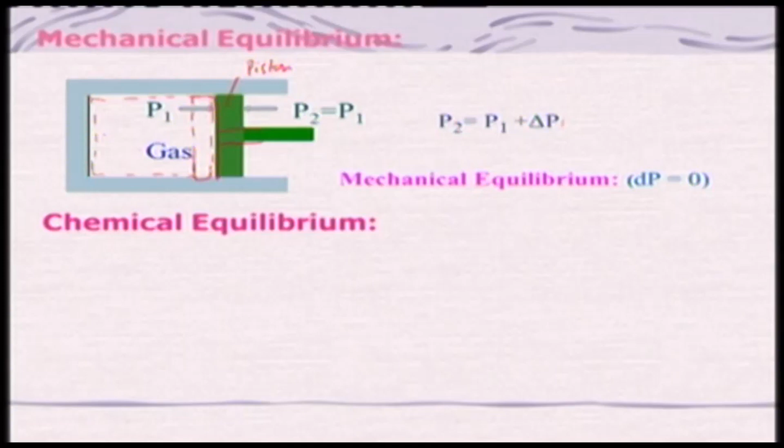So, let us take a similar example to what we had taken earlier. These are two chambers. The first chamber contains oxygen at 300 Kelvin and 0.1 megapascals, and it is separated from another chamber which contains nitrogen gas at 0.1 megapascal and 300 Kelvin, and there is a partition here.

And what will we do? We will remove this partition, and then what will happen? Oxygen will be trying to move in this direction, and nitrogen will be moving in the opposite direction, because the concentration of nitrogen is 0 here and here it is very high. So it will be moving towards that. After a certain time, what will happen to the concentration of oxygen and nitrogen? It will be uniform across the whole system.

If I say this is my system, across everywhere it will be uniform, provided you have given enough time for the diffusion to take place. And as a result, the change in concentration will be 0 in the system, concentration is uniform. So then we say the system has attained chemical equilibrium.

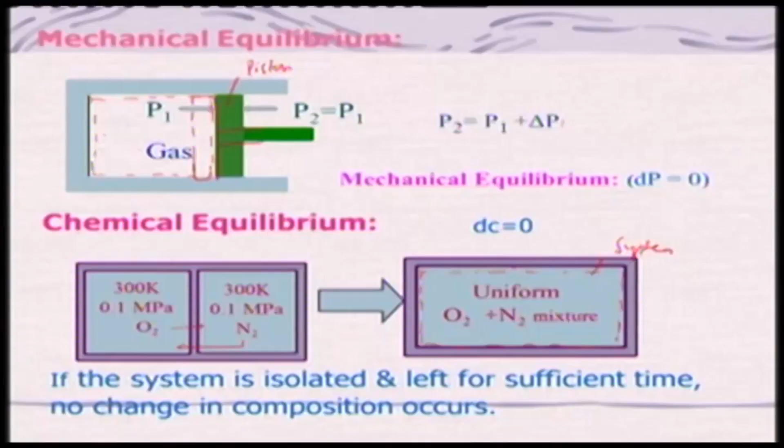This is a simple example I have taken, but let us consider another example where 2 moles of hydrogen are mixed with 1 mole of oxygen. What will happen? It will be mixed properly. Let us say all diffusion has taken place, and if it attains a high temperature, then what will happen? It will go to 2 moles of water, right.

And at the same time, the water can be converted into oxygen and hydrogen as well; both will be taking place simultaneously. That means hydrogen is reacting with oxygen to form water, and water can also be dissociated into hydrogen and oxygen, provided it is at a higher temperature, otherwise no.

So now we can say there will be a forward reaction rate and a backward reaction rate, because a chemical reaction is occurring, and there will be formation of new bonds and also breaking of bonds. All these things are going on, and the system attains equilibrium only when the forward rate of reaction is equal to the backward rate of reaction; then the system attains a chemical equilibrium.

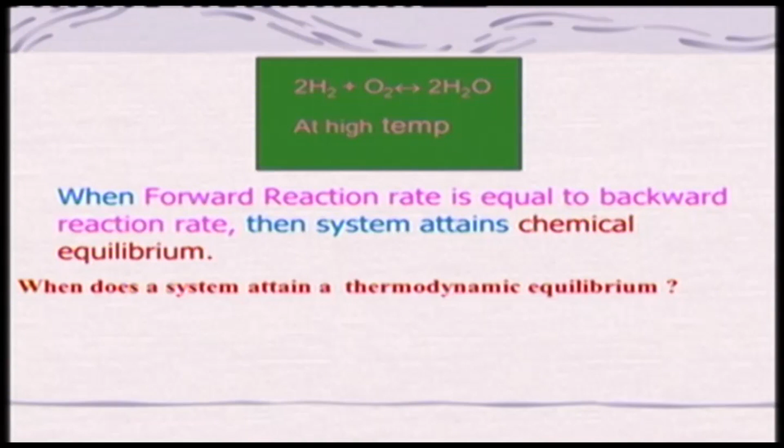So, to summarize, a thermodynamic equilibrium can only take place if all these 4 equilibria, that is thermal equilibrium, mechanical equilibrium, chemical equilibrium and phase equilibrium, are being satisfied. In other words, a system can attain equilibrium thermodynamically if all these 4 equilibria can be attained by it.

If you look at thermal equilibrium, it is basically equality of temperature, and mechanical equilibrium is equality of pressure in the system. The chemical equilibrium is basically equality of concentration, right, and phase equilibrium is the equality of mass across the phase boundary. That means, whether solid to liquid or liquid to solid, the mass will be remaining the same. So, therefore, it will be the phase equilibrium.

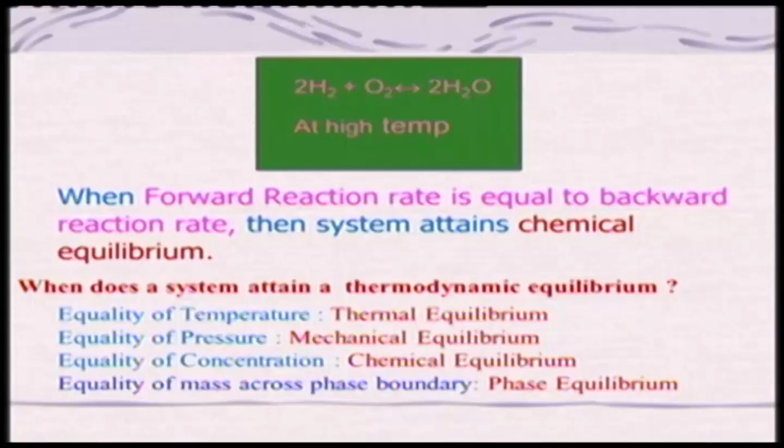Now, we will look at how stable the equilibrium is, right. That means this equilibrium state is there, but it may be stable, it can be unstable, or it can be neutrally stable, it can be metastable. So, stability is a very important part. Equilibrium states can be divided into 4 categories: stable equilibrium, neutral equilibrium, unstable equilibrium and metastable equilibrium, right.

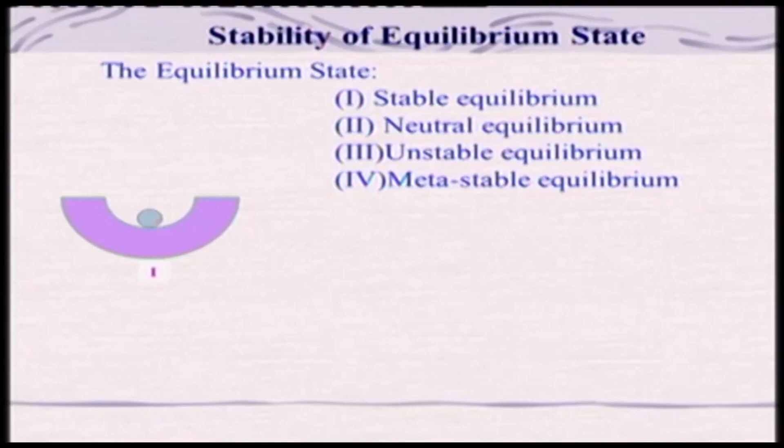So, let us take a very simple example which most of you might be aware of. Let us say there is a ball here in a curved surface, and due to something it moves to, let us say, this place. What will happen? Due to some force it has gone to this place. When the force is released, what will happen? The ball will be returning back to this position and it will stay.

Similarly, if there is a change in the position of the ball in the other direction, right, then again the ball will come back and stay in the minimum energy state, right. Under this condition we say that it has reached a stable equilibrium, because if there is a change of the position of the ball, it can return back to the undisturbed position, right.

It does happen in our life, am I right? Suppose somebody scolds you, your mind will be agitated, am I right? Yes or no? Somebody can praise you, you will be elated, and then after that you will come to your normal position, right. That is nothing but your stable equilibrium. Either you are happy or you are unhappy, your mind will be agitated; you are not in the normal, stable position. So, that is the natural thing we experience.

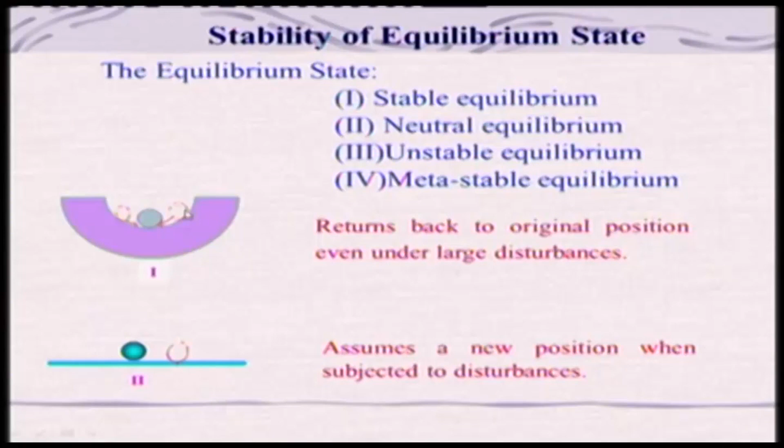And we also experience similar kinds of things in our life. For example, you were very happy with your family when you were doing your work with your family. Now, you have come over here, you are now in a stable position in this institute at this moment, right. Maybe after finishing your course, you will go and do a job or some other thing, and again you will get a stable neutral position, right, yes or no. So, this is a neutral position. But if you come back to the stable position, we call it stable when, even with large disturbances, it returns, right.

So, let us look at another case where the ball is on this kind of surface, like a mountain or hill. You might have seen sometimes, when you watched a mountain, a very big stone lying on the top, and you might be thinking why it is not falling down, and if it will fall down what will happen, particularly when you go to the Himalayan region, you may find similar things.

I had a similar experience. I was thinking, if it will fall what will happen. So, if there is a little bit of disturbance here, what will happen? The ball will roll down and it will not come back to its original position. So, it never returns back to its original position once it is disturbed, right.

So, that happens also with our day to day lifestyle now, we are becoming irritated for smaller things, right. And this is a position which should be avoided.

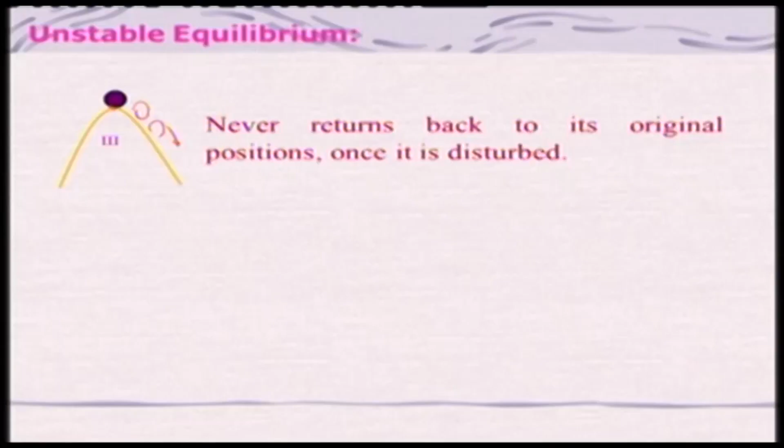So, let us look at another case, if the ball is in this position, and there is a little bit of change here. Let us say if the ball is here, then it can return back to the original position, but if the position is changed to here, what will happen? It may be a little bit stable, but if we go over here, it is going down, it is becoming similar to the unstable equilibrium kind of thing.

That means, if there is a small change, it can manage, it can come back to its original position. But if it is subjected to a large change, then it cannot really return back to its original position; that is known as metastable positions.

If you look at phase change, a lot of metastable positions do take place; when we discuss phase change, we will know you can have subcooled liquid even at a little higher pressure. And there is also iron, like in cementite, in a metastable state that can remain for years together. And if you look at your glass, glass also is metastable; if there is a little jerk, it can break, not like toughened glass.

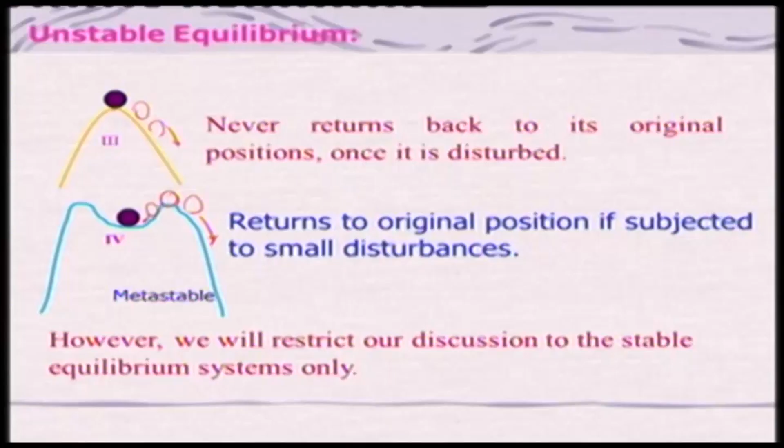However, we will restrict our discussion to stable equilibrium systems only, and maybe I will discuss a little bit about metastable equilibrium when we discuss phase change processes. So, now let us look at process and cycles in thermodynamic systems, because the thermodynamic systems are in the state of equilibrium, right.

And if you look at the process, it basically takes place whenever a system is interacting with its surrounding. It will go from one thermodynamic equilibrium state to another thermodynamic equilibrium state. That change in the equilibrium position, from one position to another, is known as a process.

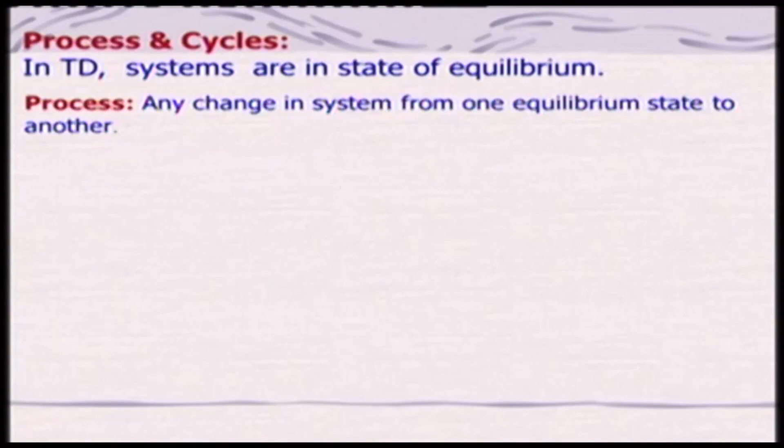So, let us consider our piston and cylinder, which contains some gas, and this we call the system boundary. If there is a small change in pressure, what will happen? The system will move and attain an equilibrium position. The piston will move in this way, and it will attain an equilibrium position.

For example, let us say that you are at state 1 at this point. And suppose, as I told, there is a small tiny pressure change and it is moving; then it will come to position A. And if you go on changing this pressure by a small amount, the gas molecules nearby will try to resist this motion, and as a result the pressure will be increasing at this point, because it is being compressed, right.

And you will attain another state B, and you go on attaining these various states as you change this pressure on the other side of the piston. So, the point will be moving like that, and you attain a state 2. If I join each position of the system as it goes, we call it a path, or a process path.

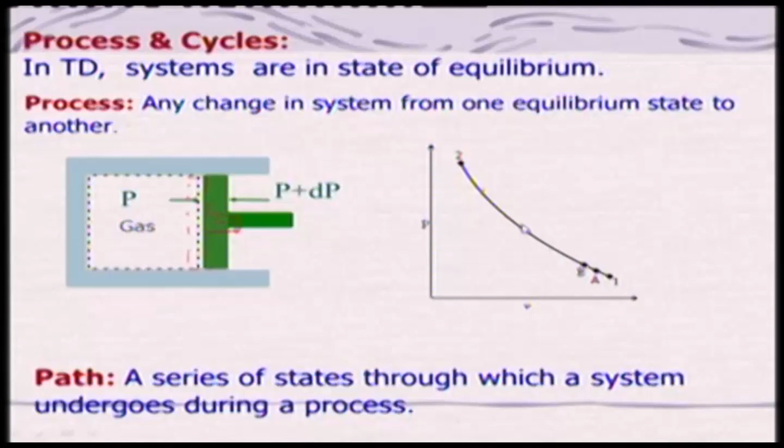That means, a series of states through which a system undergoes during a process, we call it the system path. This we call the system's process path. Basically, this path is taken during the process.

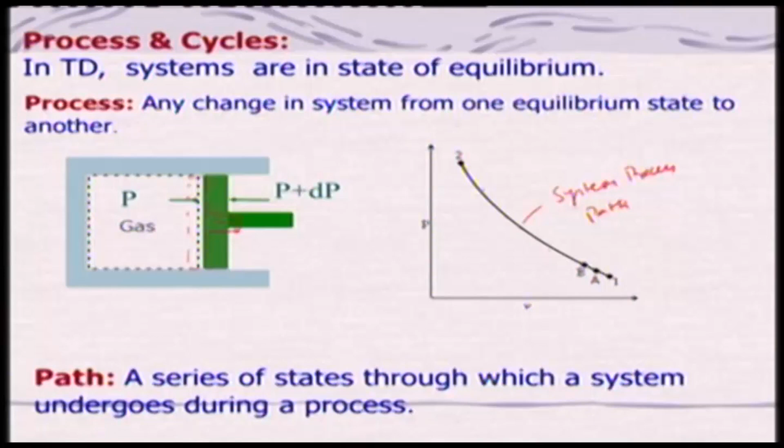Now, let us look at when a system returns back to its original state. Let us say you are here at state 1, and you are moving through this path during the interaction of the system with its surrounding, and then you reach a state 2 here, and you can return back to state 1 through another path, or with the same path, or take another path here and come back here. So, this we call a cycle.

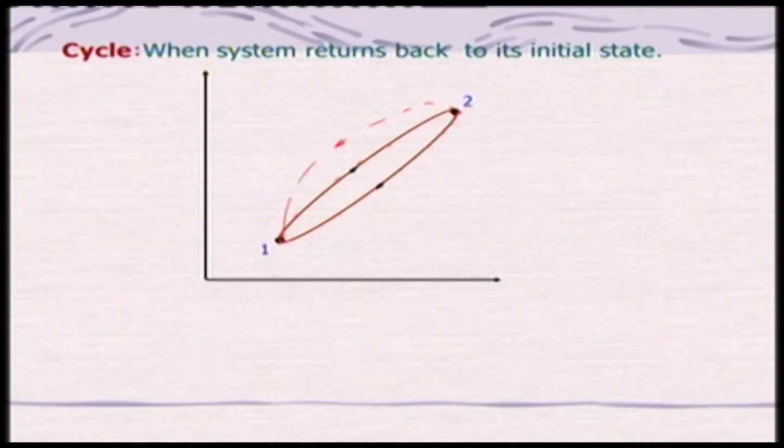In the cycle, it will not depend on the path. Am I right? It does not depend. If it is coming back, this is a cycle, right. So, it will depend on the two states. But of course, if you look at the work done, energy interaction will be different for different cycles. But in case of a path, if you want to define a process path, this is my process path, 1 to 2, and this is another process path.

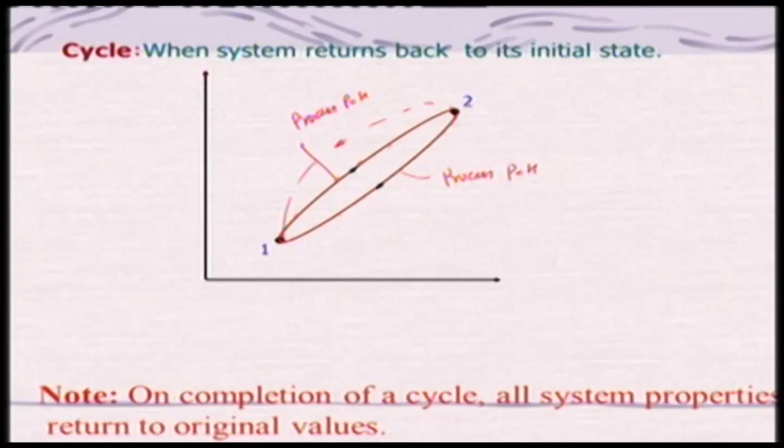Now, if I want to define the process path, what do I need? I should know state 1, state 2, and also the path taken by the system, right. Whereas in the cycle we always bother about the 2 states, of course it can take a different path. So, on completion of a cycle all system properties return to their original values. That means, if it has returned back following a cycle path, the properties will be the same as when it started, but for the process path it need not.

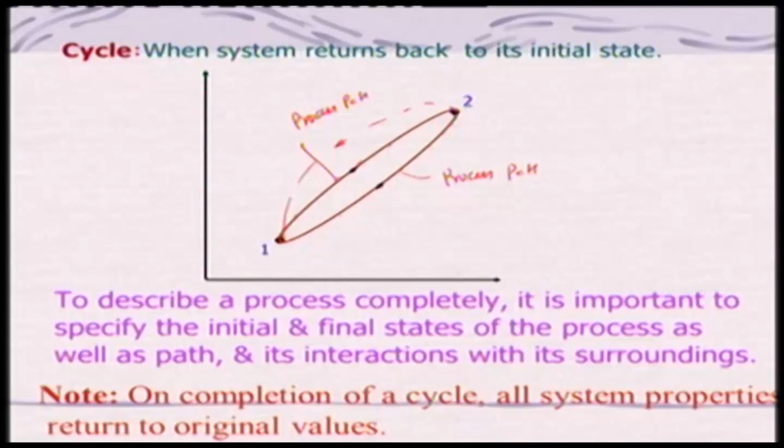So, to describe a process completely, I am repeating again, it is important to specify the initial state and the final state of the process as well as the path and its interaction with the surrounding. That means, you need to know the initial state, the final state, and also the path taken by the system during its interaction with the surrounding.

So, in thermodynamics we will be looking at a quasi static or quasi equilibrium process, right. Quasi means basically a very slow manner, or the change is not very high. Suppose we take this example of our same piston and cylinder arrangement, where the gas is contained at a pressure P1 and V1. There are a lot of weights here which are balanced by this gas pressure P1, and it is in equilibrium at state 1.

And let us say 1 kilogram of weight is there, and then I will remove from here weight blocks of maybe something like 5 grams, right. It is very small as compared to 1 kilo. 1 kilo means like 1 kg of force, am I right? So, what will happen then?

Of course, I am assuming the friction between the cylinder, this is my cylinder, and this is the piston, is 0. That means there is no friction between piston and cylinder, which is not true in a practical situation. Can you have a piston cylinder without any friction? Certainly no. But however, you can minimize it. Let us say we assume it to be 0, then what will happen?

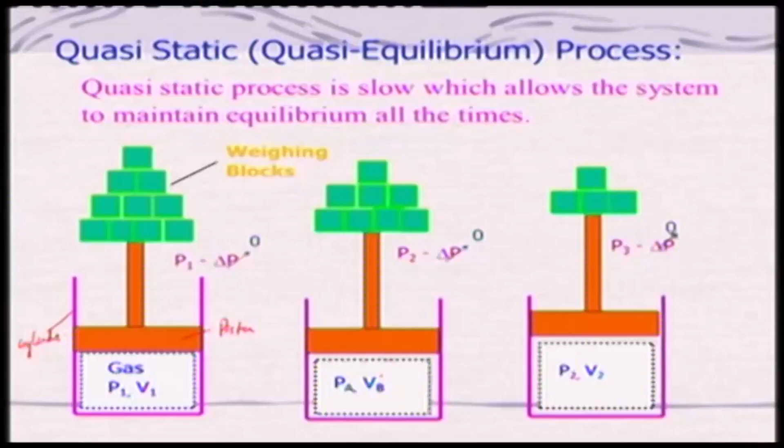So, it is uniform all the time, and that process is known as quasi static process, and in classical thermodynamics we will be assuming that it is all the time in quasi equilibrium position. So, you might be thinking why we are emphasizing on that, right. Why we are emphasizing that it should be quasi equilibrium?

Because of the fact that suppose you are at state 1 and there is a tiny change and then you are coming to state A, or this position, and then if I again put back that tiny weight which I had removed, then it can go back to state 1. Okay. But if it is too much, it cannot. So, this process is a very slow process. As a result, we can

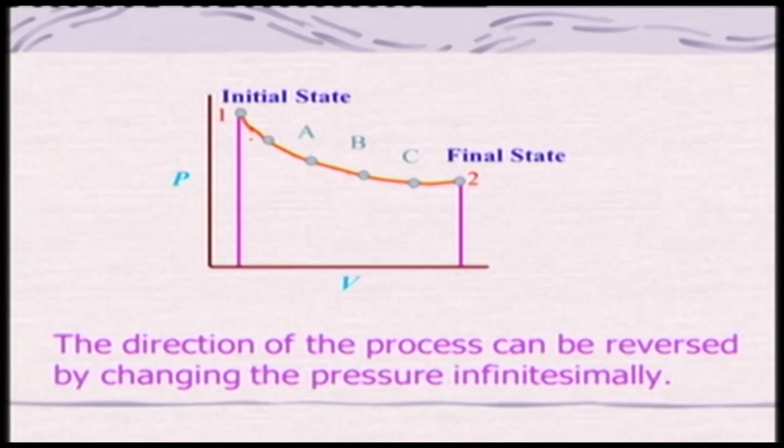change the direction of the process from this to that in a slower manner by changing the pressure or whatever the gradient is there. In this example, it is the pressure; it may be in temperature, it might be in concentration gradient. So, by an infinitesimally very small amount, a process can be reversible, right. But let me tell you, these are hypothetical situations.

However, in practical problems friction will be there, you cannot have such a slow process, people won't look at it. But when we analyze, we can, and some processes can be similar to this, not the same. Okay. So, in classical thermodynamics we will be using the quasi equilibrium concept very often, right. Is that clear? Because this is a very important concept, which is the backbone of classical thermodynamics, the quasi equilibrium process.

So, therefore, we call it a reversible process when the system and its surrounding return back to their initial state, right. Whenever the system is interacting with the surrounding, there will be some change in the system and also its surrounding, and if you reverse it back, both changes will be nullified, and it will return back to its original position. We call it a reversible process.

That means, the process should be quasi static or quasi equilibrium. All reversible processes must be quasi static, but all quasi static processes need not be reversible. Are you getting this point? It may be a slow process, but if, by reversing it, the system and surrounding are not returning back to their initial state, we cannot call it reversible, although the process is slow.

Okay. However, all natural processes are irreversible. In engineering, we try to make them as reversible as possible, but it will be impossible to eliminate friction so that it can be fully reversible, right. And during certain processes, some properties may remain constant, which might have practical implications also, and those processes we can define in different ways,

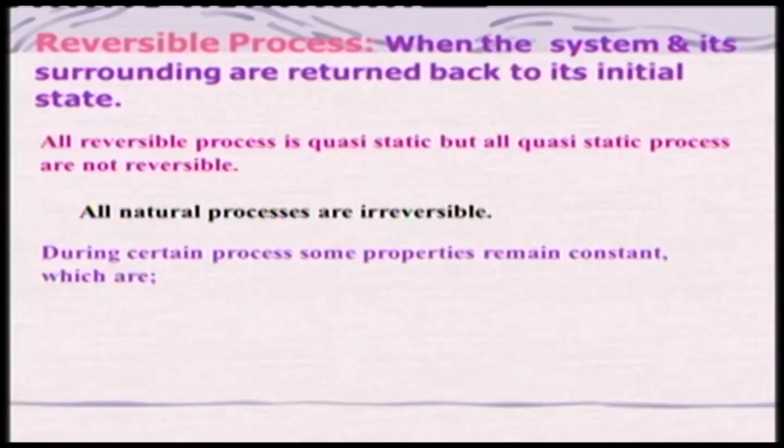which you might be aware of. If the temperature is remaining constant, what do we call that process? Isothermal. If pressure is remaining constant, we call it an isobaric process. If the volume is remaining constant, we call it an isochoric process. And if it is adiabatic, meaning no heat transfer between system and surrounding, and also reversible, then we call it an isentropic process.

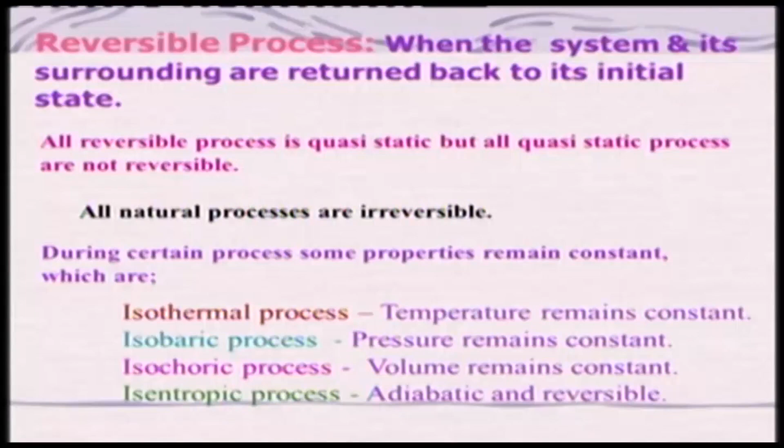So, these are the processes which we will be discussing very often, and we will be using these processes by mimicking natural processes or actual cycles, idealizing them. Of course, in some situations it may mimic the constant pressure process or isothermal process.